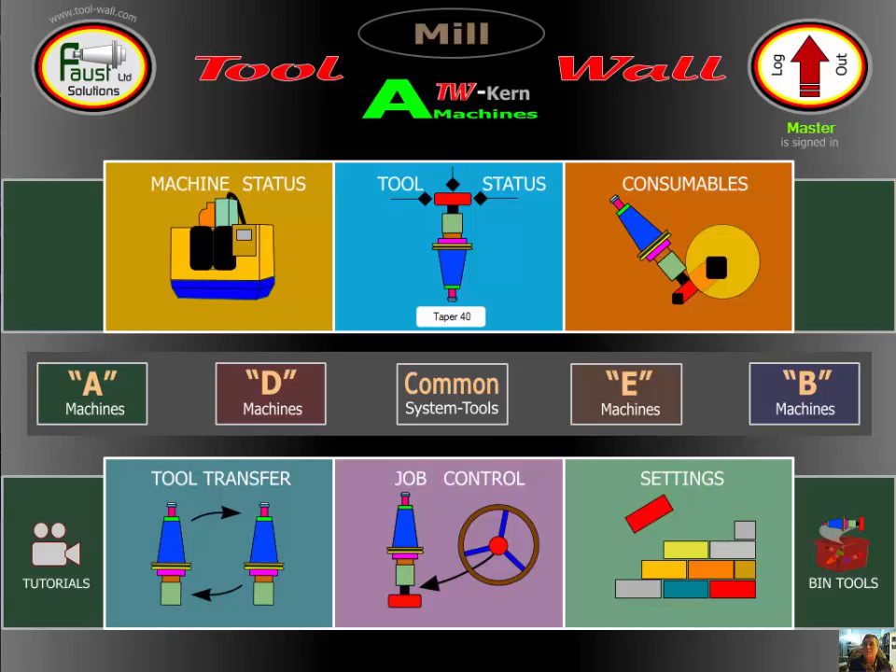In this video, we want to see how we can use Smart Tools to mill off or prepare a workpiece. So let me open up the main menu of Tool Wall. The machine in question where we want to mill something off is machine number 2, so we go to Tool Transfer and go for machine number 2.

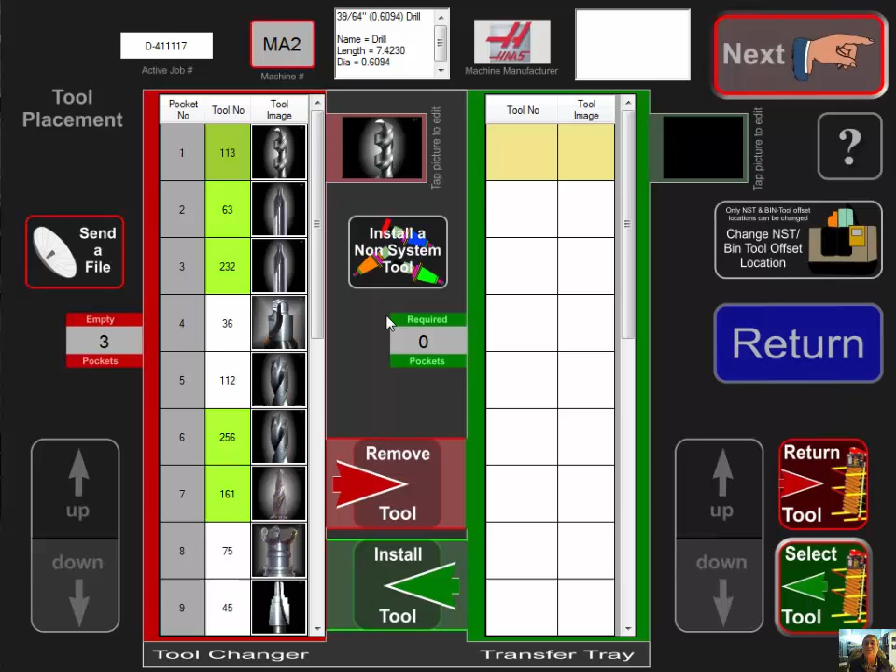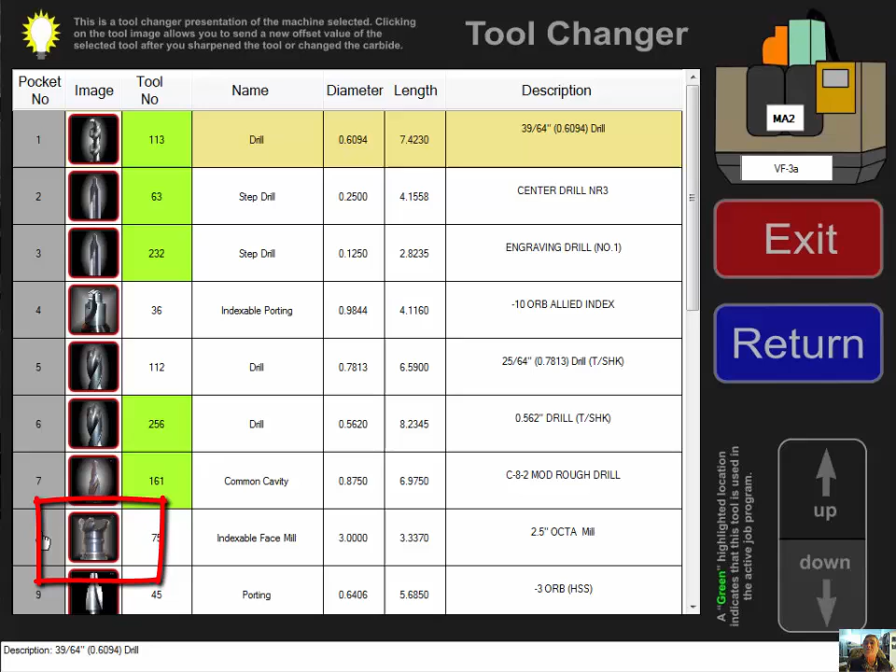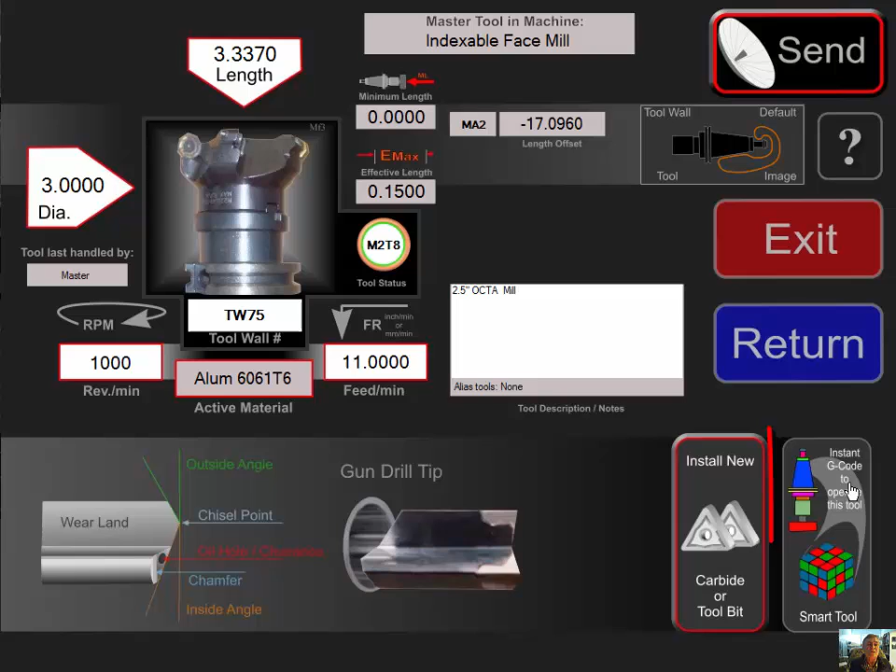On the left side I have my tool changer with all the tools, and active tools in green, or I can see an expanded view of my tool changer with more description. For the milling I want to do, I'm going to use the tool in pocket number 8. So I clicked on it and I now have my tool description background, and on the right bottom I find Smart Tools. So I'm going to click on Smart Tools.

Here I find in my background that I can use several tools. In my case, what I really want to do is mill it off and put a finishing cut to it. I don't want to chamfer. So this is the tool I've selected, which is the primary tool, and here is my finishing tool. So I'm going to enable my finishing tool and save it.

My starting size of the workpiece is 4.1 inches, and I want to finish my piece off at 4 inches. I want just a light finishing cut to clean it all off, of 0.007. So now over here I can see what I have done. Main cuts, with the maximum allowed to the first cutter, is none. I have a remaining cut of 93 thou and the last cut of 7 thou.

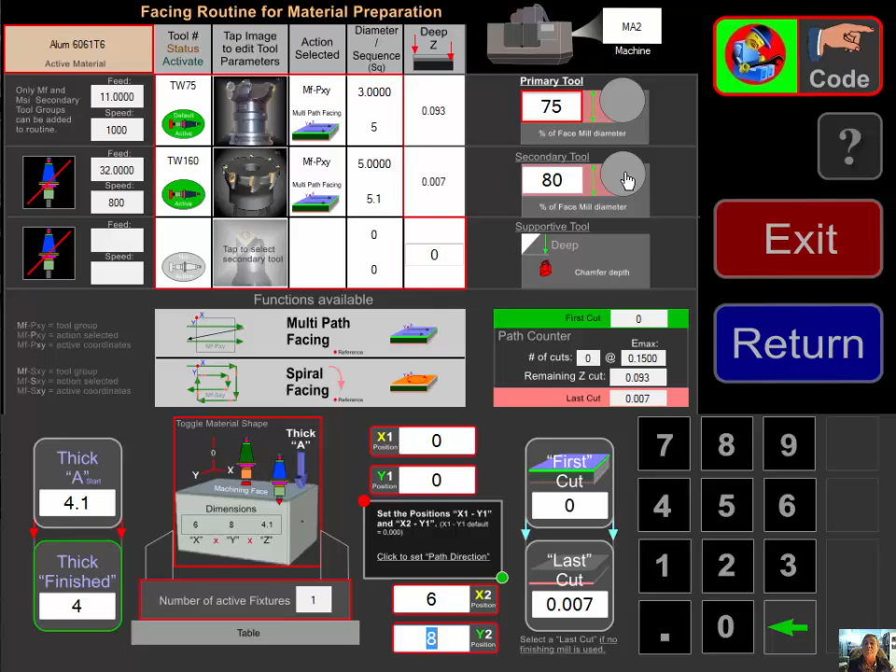So now I'm going to specify the size of my piece. I have a piece of 6 by 8, and I'm going to use only one fixture, which I can adjust here. I can have multiple fixtures, but I'm going to stay with one, and I'm going to do multipath facing cuts, where I can select either multipath or spiral. I'm going to stay with my multipath. So this is really all the input I have to do, and I'm just going to go to code.

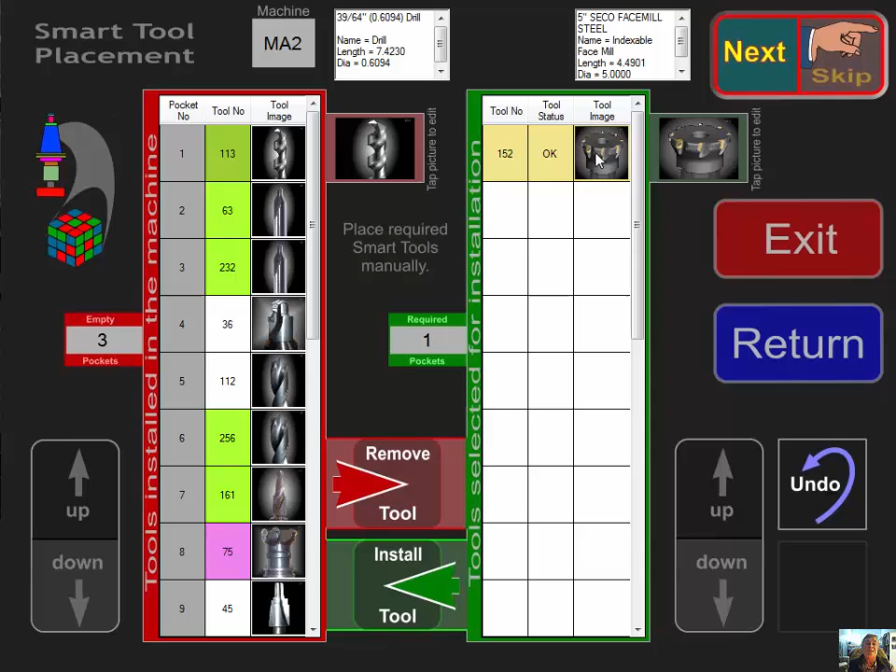Well, it detected that my finishing tool is not in the machine, so I have to bring it in. Here's my primary tool, that's my secondary tool, so I have to put it into my machine. I'm going to look for an empty spot here, and I'm going to install it. So now I go skip next. And now I have to install my secondary tool, the finishing face mill, which is not in the machine, and I have to bring the tool offset in.

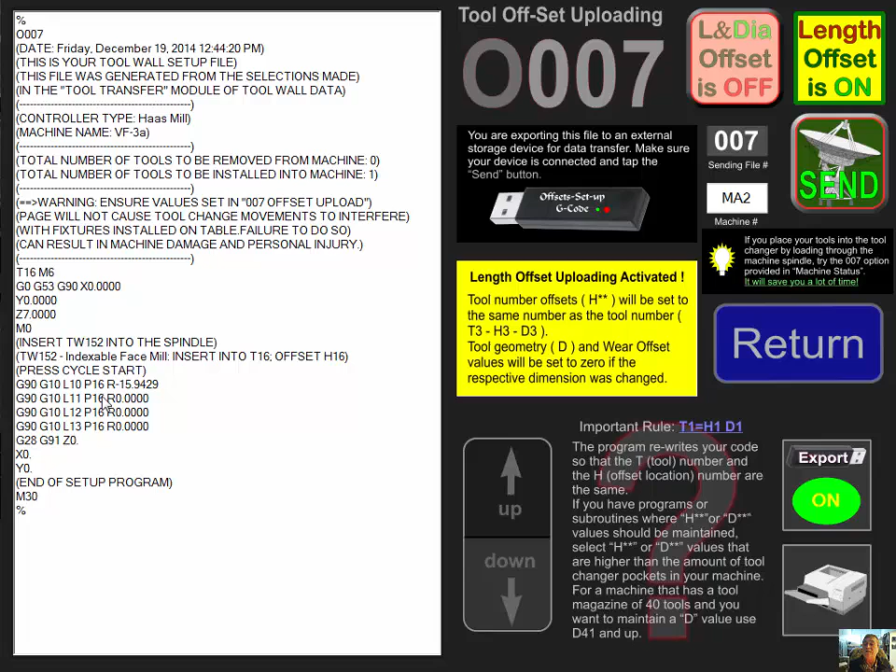It has generated an installation file, which I transfer to the machine and run. It will bring the spindle out, and all you have to do is insert the secondary mill into the spindle and press cycle start, and here is the offset set. So now the second tool is installed, and here I now have my path.

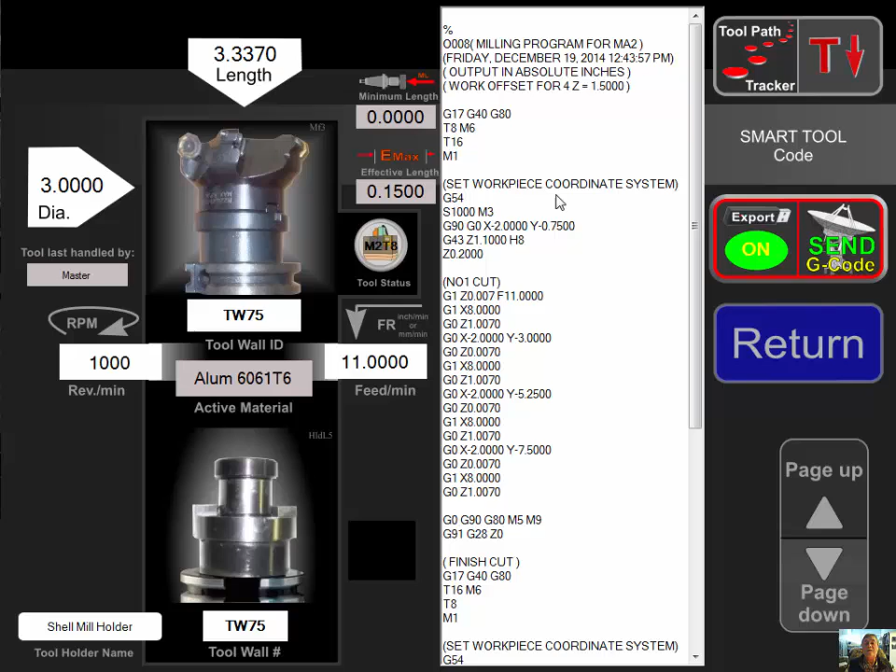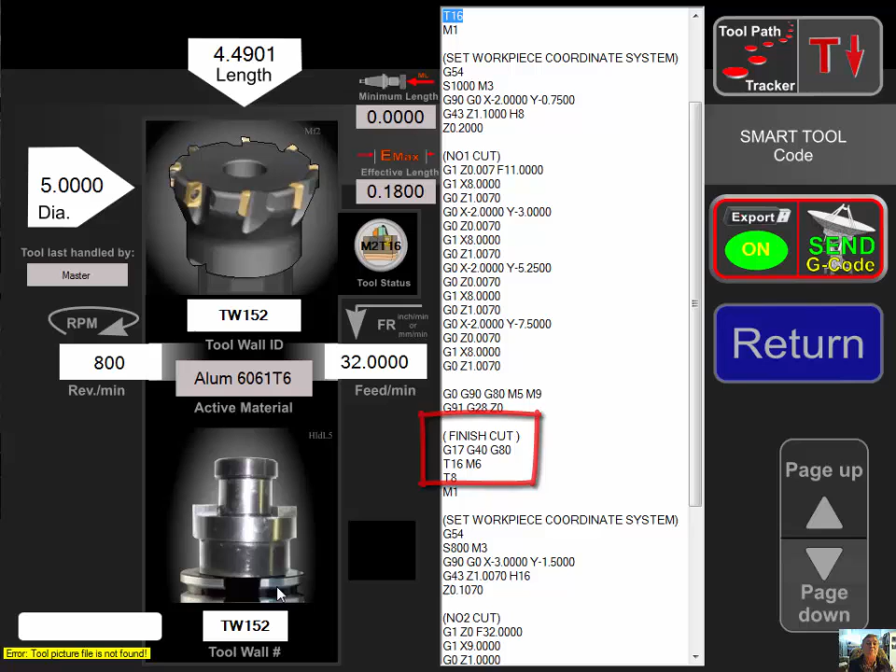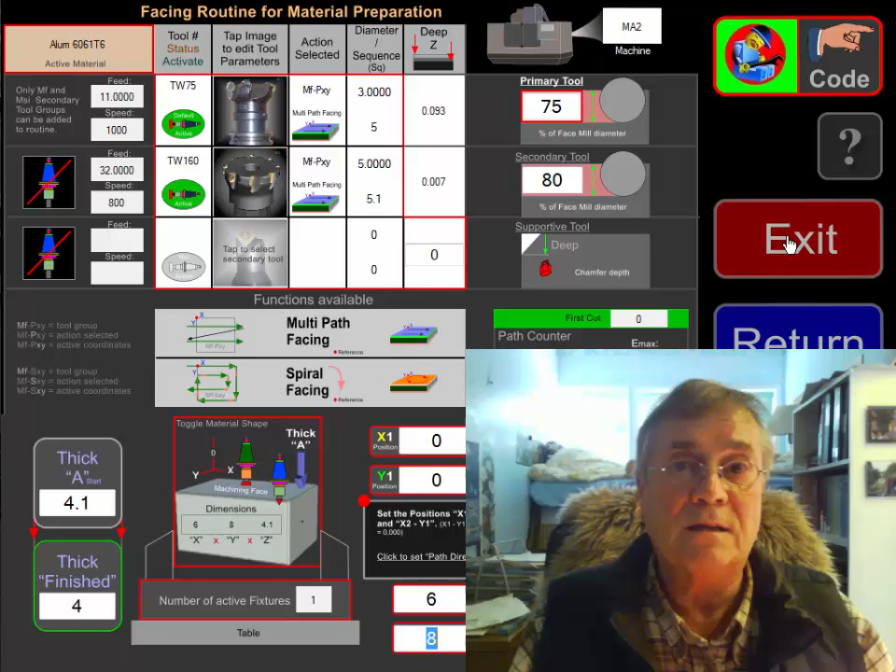Here's my G-code for my operation. I'm going to use my primary mill and go down here, then I use my secondary mill, or my finishing mill. So I'm going to send this one to the machine, and I'm ready. Now I can start milling. This is how easy you can use Smart Tools in Tool Wall.